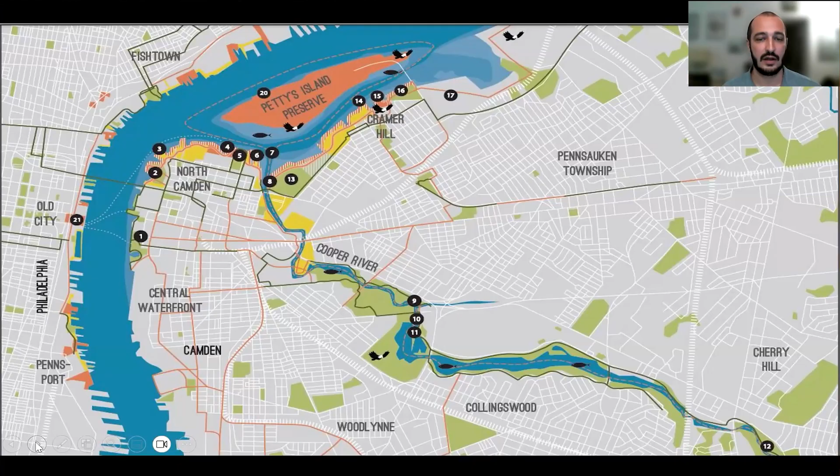Nationally, conservative estimates indicate that the U.S. has over 2 million acres of unused or underutilized public space that could be tapped into for community schoolyard work. We feel strongly at TPL that when transformed using this community-first model and kept open after hours and on weekends, they can greatly service not just public space needs, but a lot of other social needs as well.

We accomplish that through a shared use agreement where the schools that take on improvements generated through these projects ultimately agree to keep them open after school hours and on weekends.

That's the fundamental difference, in our opinion, between a green schoolyard and a community schoolyard: this is really to service broader community needs and not just the climate needs typically associated with greening. Every dollar invested into a public space is also partially invested towards public health, community and social cohesion, and climate equity and justice. Outside of the science of this, we know how important these spaces are for people to come together, find common ground they didn't know existed, and use that common ground to work together in other ways that support their neighborhood and community. This is about ensuring people have spaces to do more good together than they can apart.

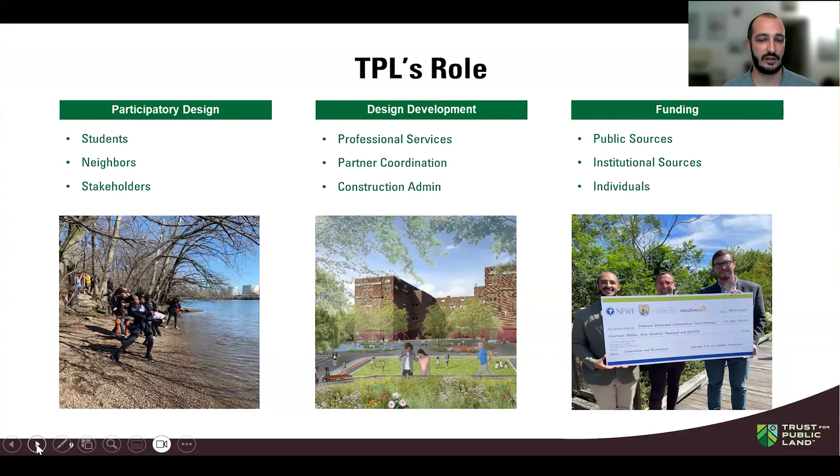And lastly, we fundraise. This does not occur for cheap or for free. We work hard to cobble together capital stacks, marrying public, private, corporate, and philanthropic support to take these projects through to completion. Next slide, please.

Just a quick bit on the impact of these projects. They're profound. I see it every day. At the curriculum level, we hear routinely that every class wants to be outside. Gym classes in particular can't get enough of these spaces, but sciences, math, and social sciences in particular, there's very direct ways that curriculum can be integrated into these spaces.

You'll see them often through the signage that's installed, through the types of murals that are painted both on the ground and on the walls, the types of plants that are used, and the lesson plans that are provided to the school after the projects are complete.

I think most important for us in the social area is the improvement we see in performance across all key areas at the school level. We hear repeatedly about reductions in discipline issues, improvements in academic performance, improvements in social and emotional skills. Just one anecdote: we had a school where suspensions dropped from over 50 to 0 the year after the schoolyard was completed. Obviously there's a lot that goes into that, but it shows the type of catalytic moment these spaces can inspire.

We also hear constantly about stronger social bonds, new friends that form, existing friends that become deeper friends, not just during the school day, but in particular beyond school hours.

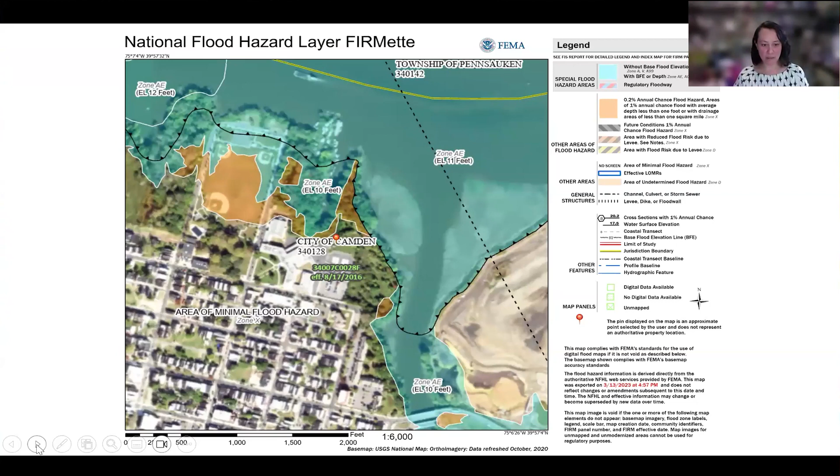And so, of course, staying out of the floodplain is important. This is the result of the participatory process that Justin described. This came about before we were brought on board and was part of the request for proposals. So we took this as the jumping off point and tried to dissect what we're seeing here so that we can carry it through into the design as it becomes more real and married to the survey and what we know about design and what conditions are on the ground. But you can see they had a pretty big vision for stormwater management, which is really cool.

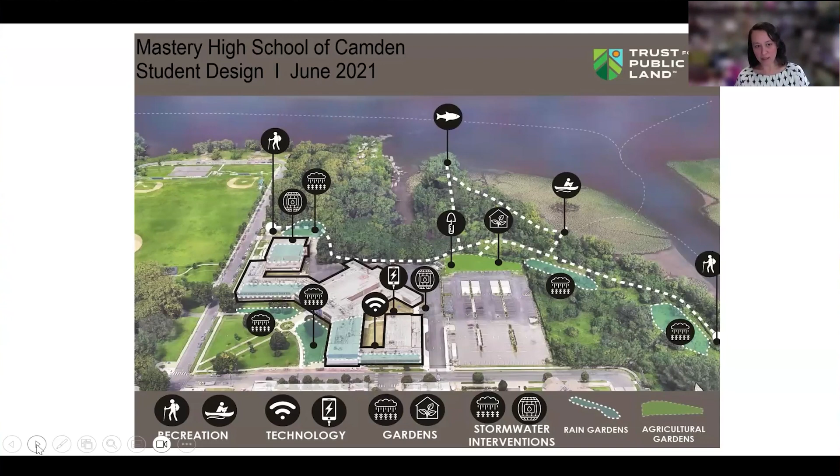They were proposing to capture runoff from the roof and divert it into rain gardens at the front of the school, as well as rain gardens in the areas between the building and the river and the parking lot. They were definitely interested in cell phone charging - that came up at the pre-bid, and I think anyone with children of any age knows how important technology is to kids, especially in their downtime. There was a lot of interest in gardening and community spaces for gardening, as well as interest in recreational boating access and improving habitat at the river's edge.

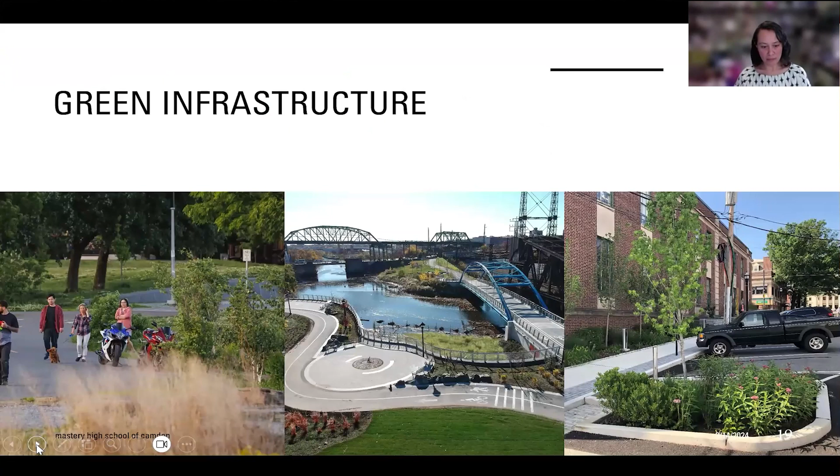And we think of all of our projects as green infrastructure and take that in a broad way to mean stormwater, but also tree canopy, creating park space, cooling cities, providing recreation, and weaving that all together in a multidisciplinary way to really address the problems of our current times.

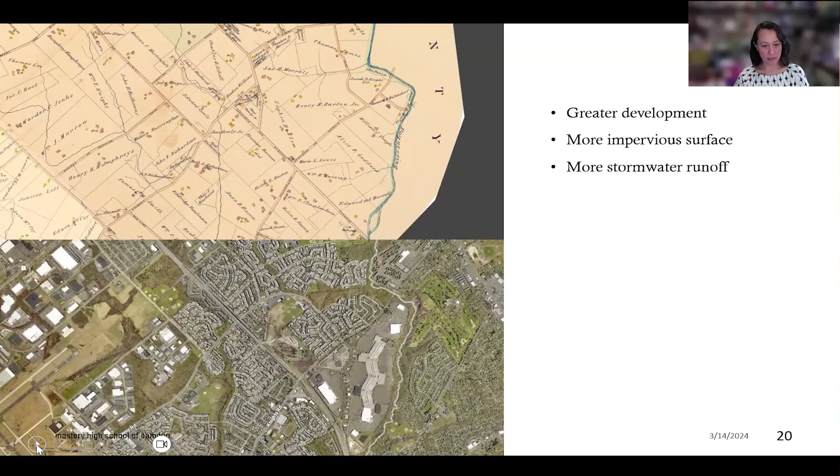So whenever we can, we always consider our projects from that standpoint - how can we use green infrastructure to improve where we live? And at the pre-bid, there was a group of students that talked about what this project meant to them. It was very, very inspiring and eye-opening, because I didn't grow up in a place like Camden. I grew up in Navy housing, which is pretty much suburban sprawl.

I'll show you photos of what their schoolyard looks like today. Having access to that schoolyard, which isn't anything to shout about, really meant a lot to them. This project, where we have an opportunity to bring nature into the campus and connect them back to the river, was really important.

They were very articulate about how they expressed that. They didn't use the word biophilia, but they talked about how nature calmed them down. Being in their courtyard helped relieve stress, helped them feel better, gave them a place to do yoga or just sit and feel the breeze on their face. We kept that in mind as one of the considerations as we moved forward through the design, along with a host of other things we held close based on what we'd heard from the students in the participatory design process.

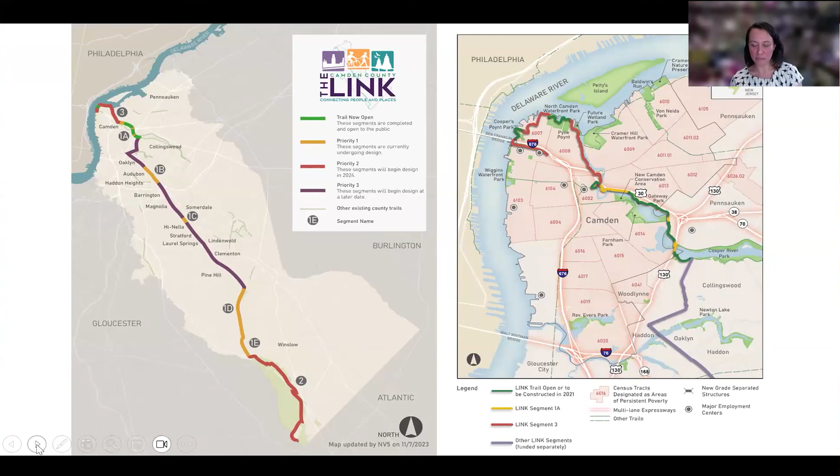Just to show that the link, since it's so long, goes through many different landscape typologies - starting in Camden and going through Haddon Heights and Collingswood, sometimes along the river, sometimes on roads. It'll be a really interesting trail and a way to see the different landscapes in Camden.

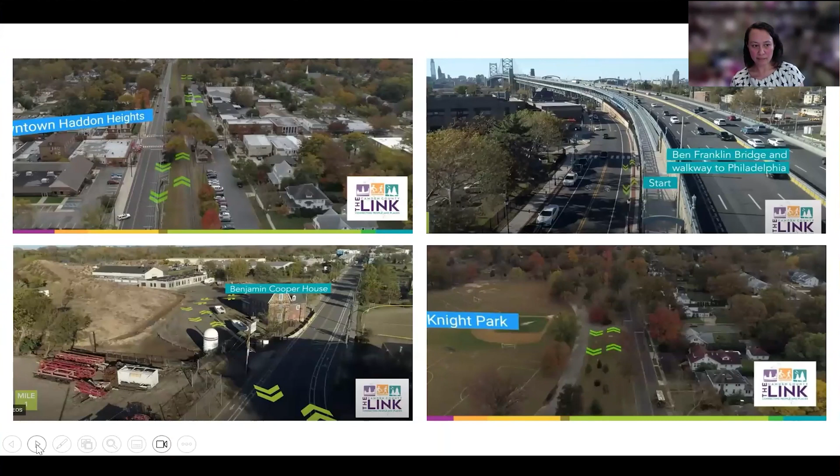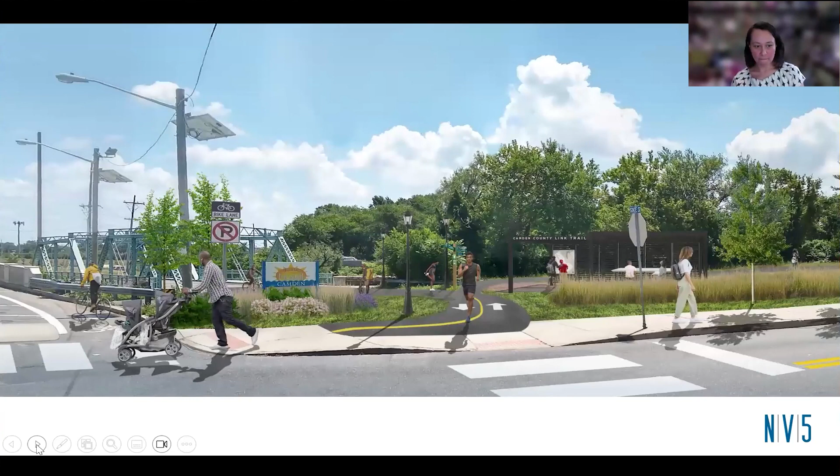This is right up the road from Mastery, and it shows an existing lot where the link trail will go through. This just shows a vision for what this trailhead will look like and what kind of impact it might have in this community. This, of course, will link to the trail as it goes behind Mastery.

This will be a very visible bridge over Route 30 for the link trail, which will really make this a visible thing for everybody using Route 30 and tip them off that there's a regional trail right here.

So we talked about phase 1. Just to show it on the students' diagram, it included areas outside the floodplain, as I mentioned. A priority for them is the courtyard space where they currently have their lunch, and then the grassy area between the parking lot and the river where they currently have some raised beds, but there's a bit of an opportunity there.

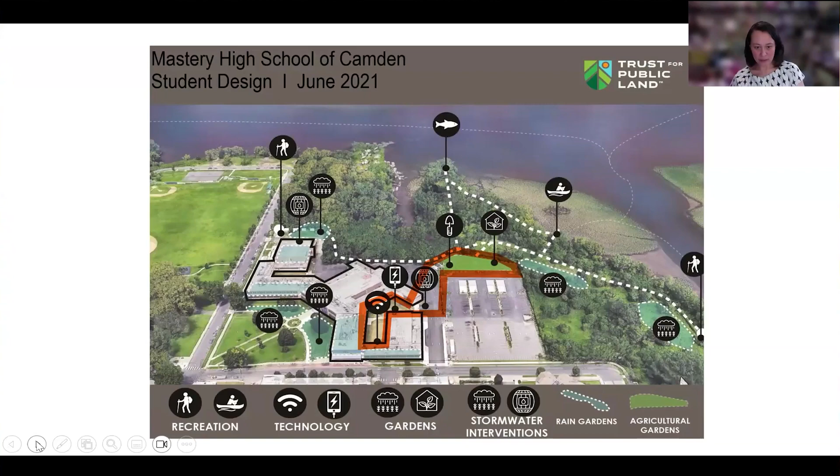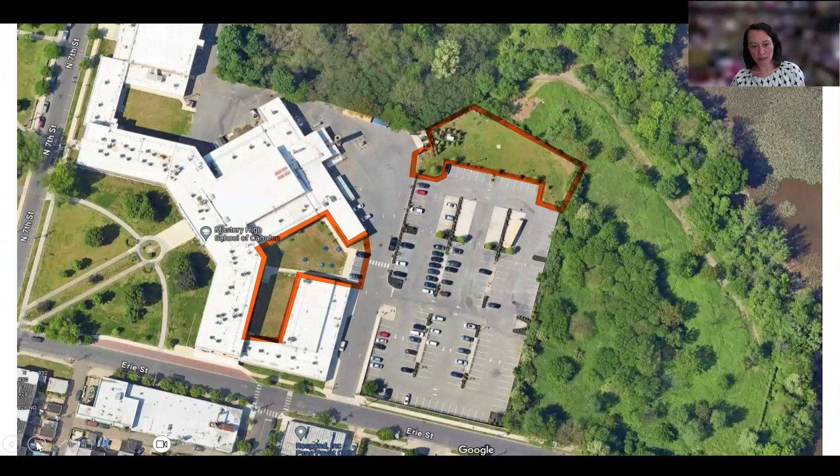Looking at it in aerial view, you can see there's no communication between those two spaces or the river. There's really no safe pedestrian route between the school and the river, and it's a really car-focused parking lot. So we thought that would be a great opportunity to create a nice green connection between the school and the river and make that as educational and experiential as possible.

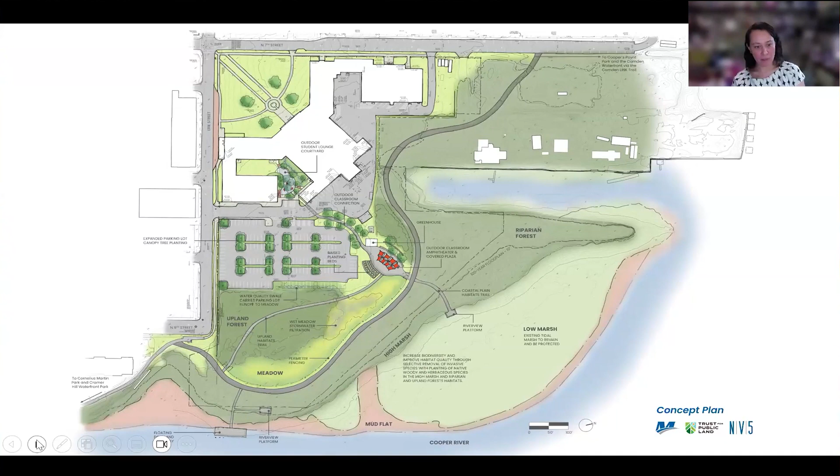Not with the giant green connection, because we needed to preserve maintenance access for the dumpsters and the generator and whatnot at the back of the school. So we couldn't close that off completely, but making that green connection as big as we could to create a safe corridor between the school and the river.

And then you can see that we were proposing the meadow as well as improvements to the more upland forest, and then at the high marsh edge and in the riparian woodland. We also felt a river view platform right over the submerged vegetation could be a great learning opportunity for students, on the right side of the image.

And then on the left side, wondering if we can get a floating dock and gangway in there past the mud flat in the Cooper River. That might be hard to pull off, but we're trying to see if we can figure it out for now. And that would give the students the boating access that they were looking for. Next slide, please. I think that's the last one.

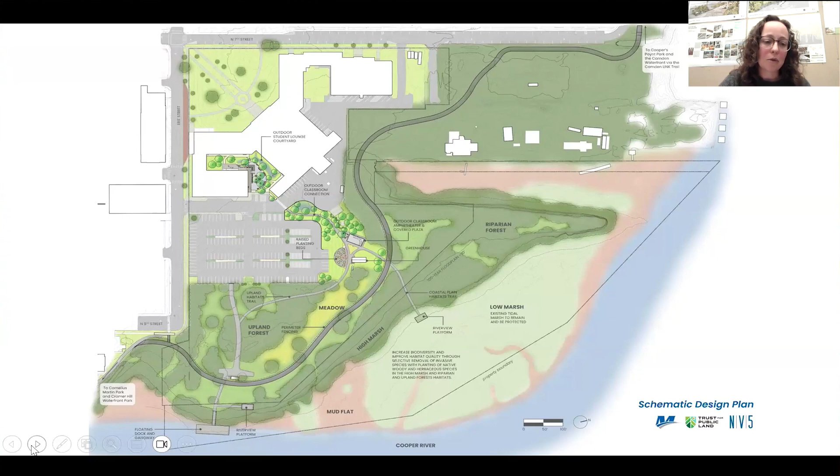I'm going to jump straight to stormwater. As Rosa mentioned, stormwater management is a big driver in a lot of our designs. This is just a brief overview of how we're approaching that stormwater management.

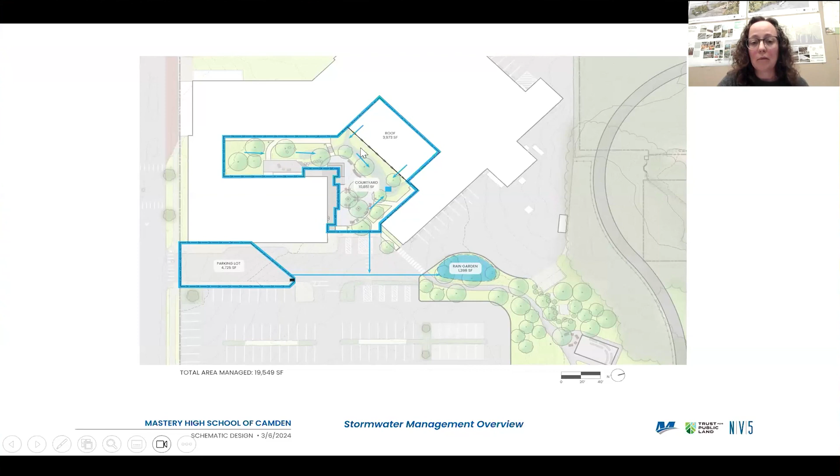We also found a potential opportunity to collect stormwater runoff from the parking lot via an existing inlet, collecting a lot more than just what was falling onto the courtyard, and giving students a nice way to invite them into the outdoor classroom—being able to see this rain garden, understand these connections, and see how stormwater flows from the building, through their courtyard, through the rain garden, and ultimately out to the river.

Jumping into the courtyard design itself—Rosa showed a few pictures of the existing courtyard. We saw a fenced-in area back in this corner, an area with some blue picnic tables in this larger central area, and a picture of an access door on the building. This area is the cafeteria, and students currently have access at lunchtime to come outside and enjoy the fresh air and eat outside when it's nice.

We wanted to think about how we can use this space to offer students a diversity of places to sit and engage with each other, find respite during the day, but also provide flexible spaces for many different kinds of opportunities, not just lunchtime.

Starting by walking out of the cafeteria, the central area along the building is an elevated terrace with a bar-height dining rail and movable chairs, offering students the opportunity to look over into the courtyard and sit and eat lunch or talk with each other. A portion of the terrace would be covered by an awning to provide afternoon shade.

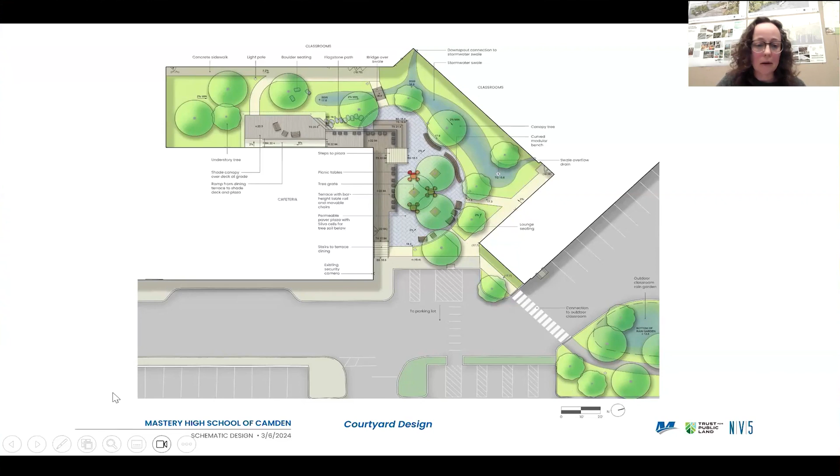There's more lounge seating along this edge, and this connects to another entrance to the building here. Moving out of the courtyard, we've established this connection—a crosswalk here, taking a big bite out of the parking lot by adding trees and grass and the rain garden that we saw in the previous slide.

Moving to the outdoor classroom, we have the large rain garden here—this is the invitation for students to come and explore outdoors. The rain garden manages all the water from the courtyard and part from the parking lot. They'll walk through trees on a stone fines path, natural materials that can take some wear. We've got a lot of trees as we move through here, focused towards this edge, and I'll explain why in just a moment.

As we move through to the outdoor classroom space, there's a larger shade structure—I have some photos I'll share illustrating what these objects look like. Under the shade structure, this can be used for outdoor lectures and classes, but also as a flexible space for community events or performances, with some more informal seating to the left of that.

Once we get past the shade structure, the path forks. This path heading down towards the river is the coastal plains habitat that connects out to the river viewing platform. Heading in this direction, we enter the gardening and agricultural space, with a little demonstration garden area where students can take part in maintenance and understanding of gardening and horticultural practices, maintaining native plants as a demonstration of the meadow area Rosa was mentioning further down in the larger campus.

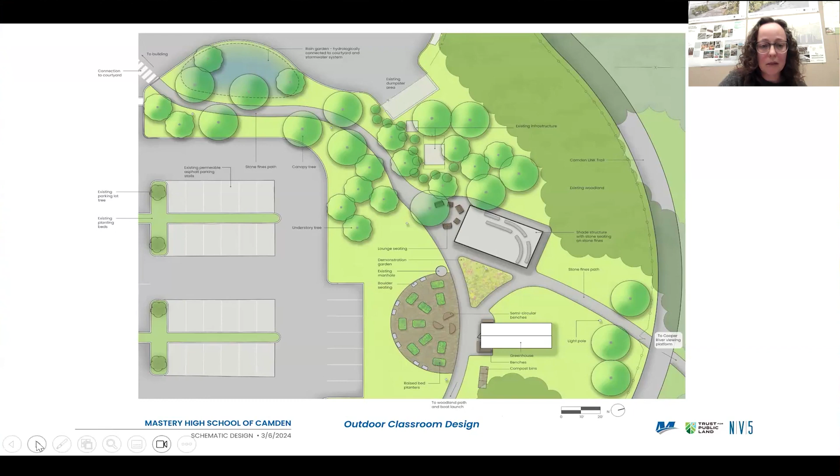I'm just going to flip through a couple quick slides of furniture. These modular benches here have a lot of different options that really set the tone and feeling of the space—whether we go with wood modular benches with the curved shape in the courtyard, or something in metal that offers a whimsical and fun, more engaged sort of seating rather than just straight benches.

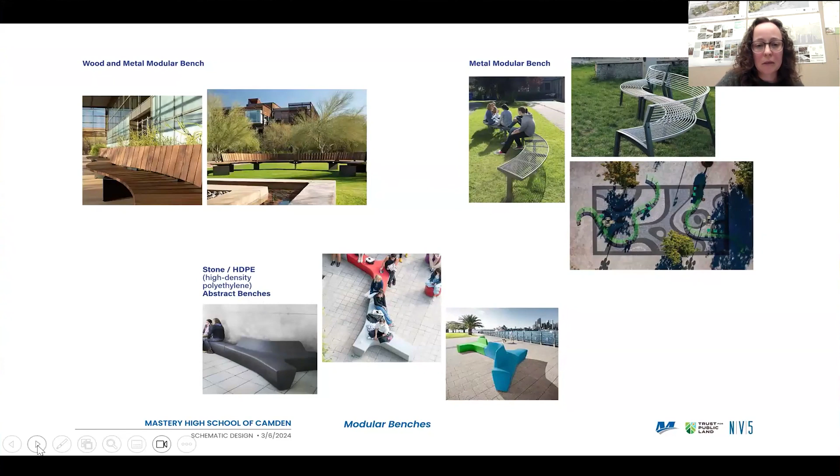We can also do something outside of the standard, like bright colors, which would clearly set a tone for that courtyard space and allow for very flexible seating arrangements. Some of these loungers really give students an opportunity to occupy the space in different ways, alone or in larger groups—just different options here with different levels of maintenance, which is certainly part of the consideration.

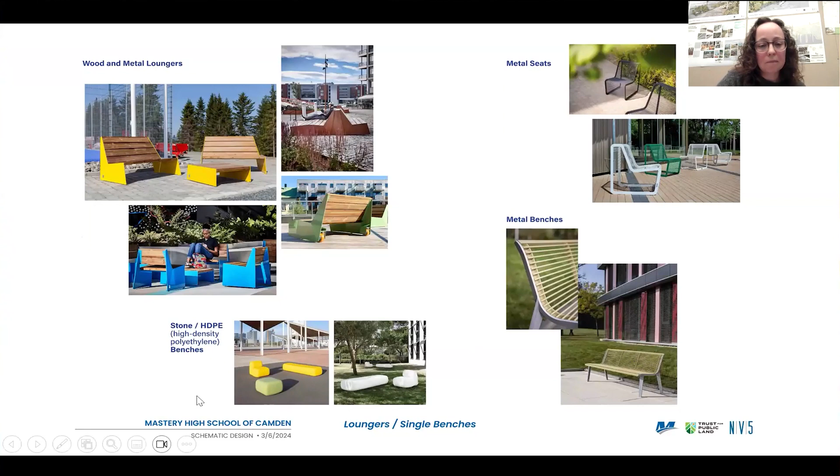Again, another colorful and different option for seating. Looking into picnic tables—standard picnic tables, but also thinking about options with seats with backs, allowing students to relax and enjoy the space outdoors.

The dining rail that I mentioned from the terrace, with movable seats—this establishes itself as a railing and also offers students the opportunity to sit and eat lunch, look through books, look at their phones, whatever they do out in the courtyard. Also including opportunities for charging, whether computers or phones, will certainly be an important part of the design.

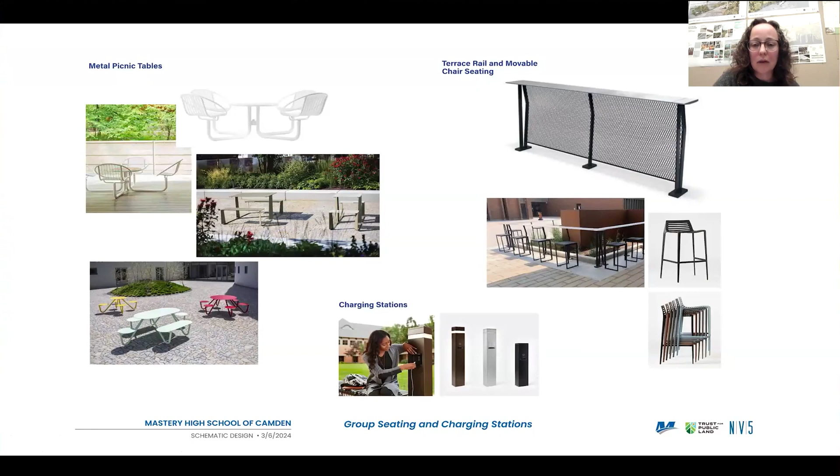Something I forgot to mention in the courtyard was the concept of silva cells, which are structures underneath the paving that allow tree roots to spread out and not be constrained by compacted soils typically required of paving materials. This helps the trees have a healthier root system, be more robust, and live longer.

The tree grates would also be part of protecting the trees, preventing compacted soil around the base of those trees, again helping them succeed.

The other option from the tree grates would be to use tree benches that also offer opportunities for seating around the trees, and then also help protect the soil at the base of the tree.

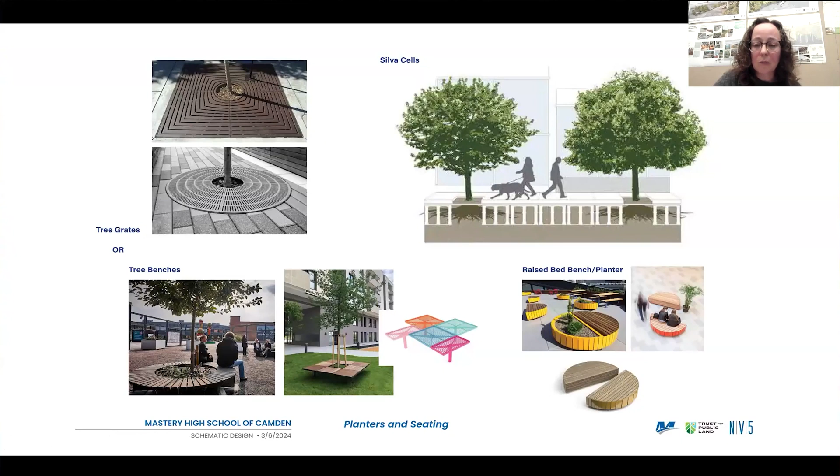These are some more fun seating options that we're looking at for the outdoor raised bed gardening area, just offering students flexibility in how they approach interacting with the space, and offering some fun options.

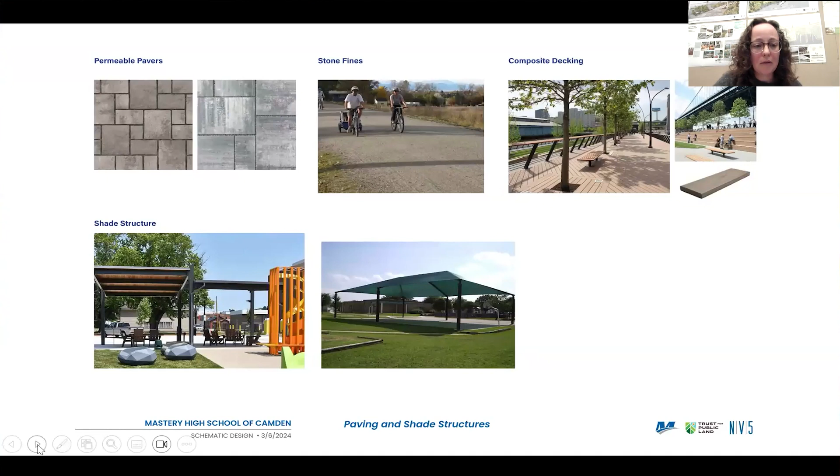I believe that wraps things up. We have just a few minutes for questions or to go back and revisit anything. Thank you all for listening.

You're muted, Fred. I said thank you very much. That was fantastic, that was fantastic.

There's so many changes happening in that area, not only on your campus, but all around that North Camden Back Channel area. We do have a couple of questions. One is: will the school and the students be able to follow up after these landscape changes are made to track things like mitigation of heat island effect and improvement in water quality flowing into the river? Is there that kind of scientific level of programming and curriculum that you're already thinking about?

That's a great question. The short answer is yes. The long answer is we have to figure out what that actually looks like. The school is very interested in water quality evaluation in particular, so they were talking about potentially having some tech inside of the inlet, which would capture flow and volume totals being diverted from discharge into the tidal Cooper and Delaware River.